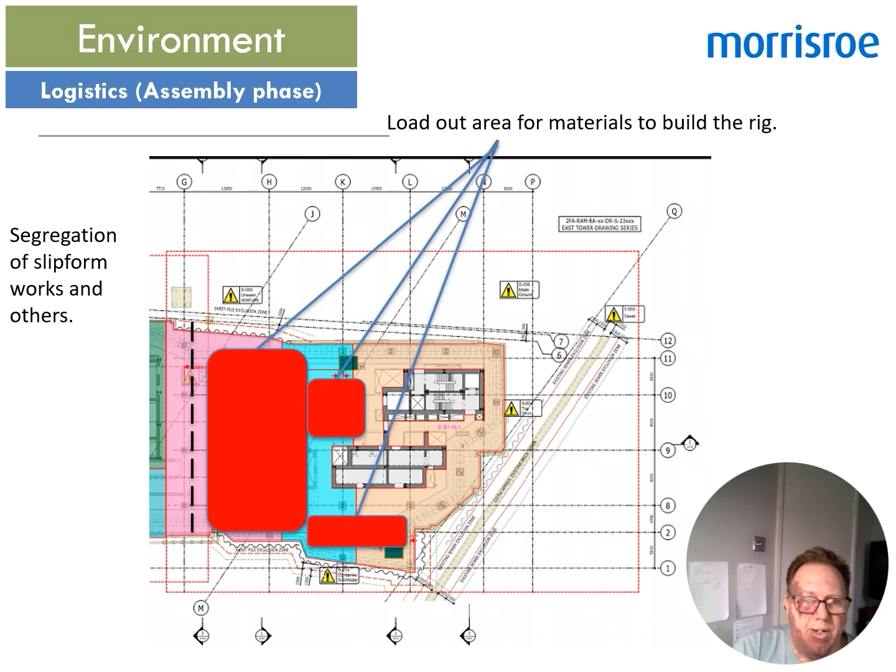We engaged quite early with our preferred hoist contractors, and the locations of hoists were very difficult to be placed. They could only be on the ground floor, and we were kicking off on the B1 slab, so they were delayed for the install, but also positioning of it so that not too much of the steel erection, which started very early on this project, would be interfered with.

So a lot of work was done with the principal contractor establishing where these positions would be and the connections to walls, etc., because this slipform had quite a few walls that fell away, cells that fell away, walls that had large openings in them. So we were very limited in how you could do it.

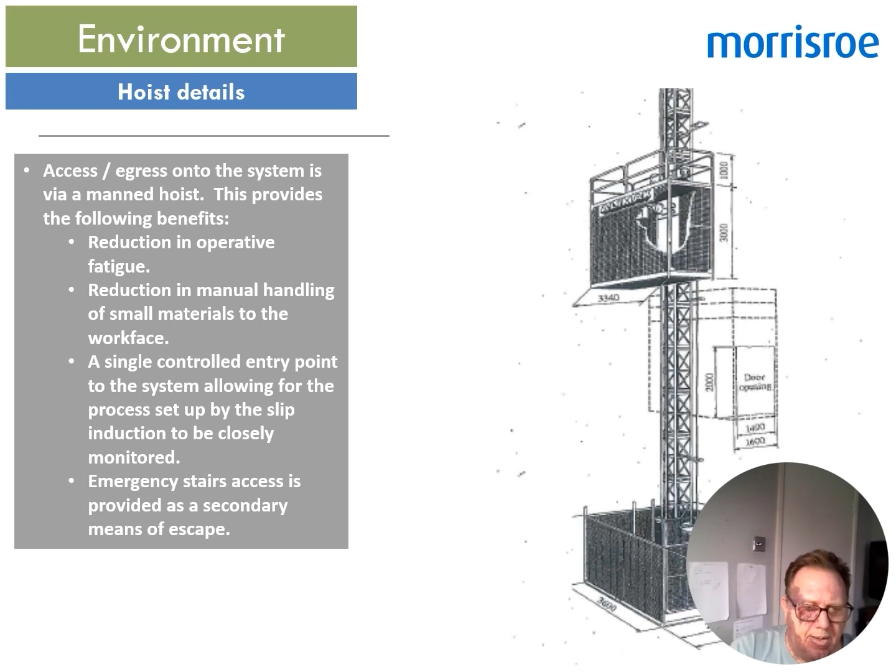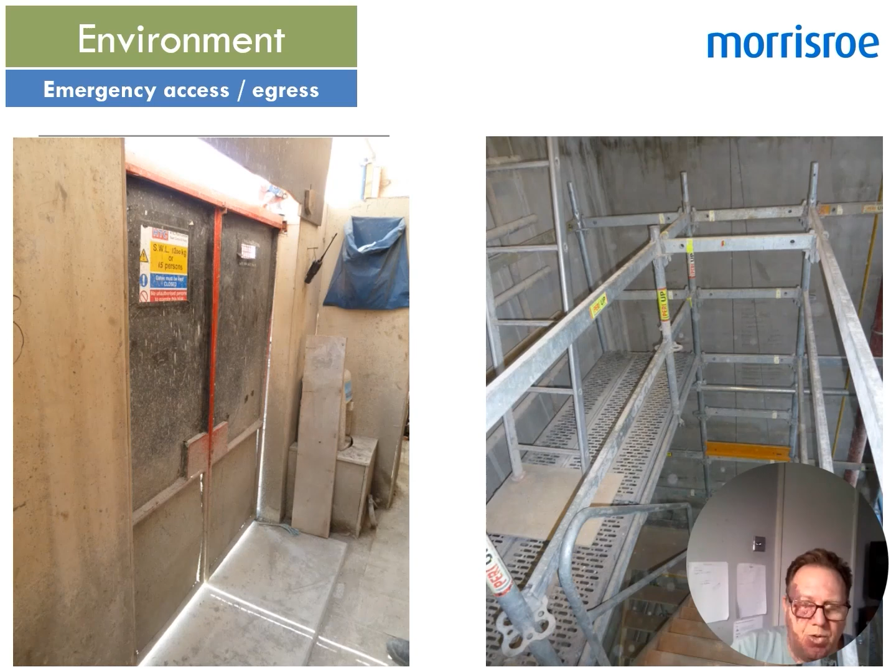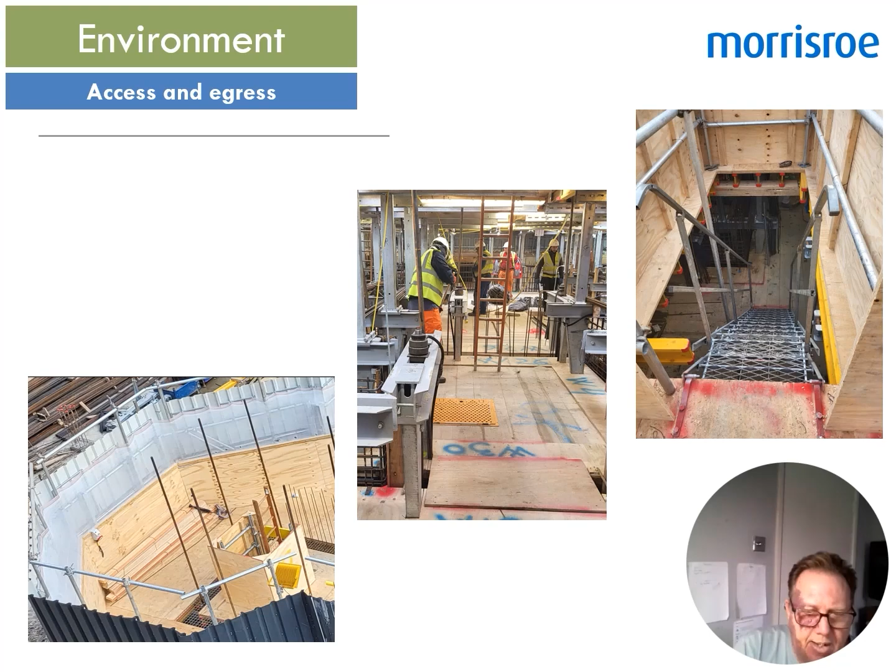We had to review machinery and equipment to be used on the rig, the hydraulic systems, with quite a lot to be done as far as the hydraulics carrying the crane. Pipeline locations are very important in case you have any blockages. We had to make sure the locations were in line with the staircases.

We also reviewed abrasive wheels. Obviously it's a fire risk, and what sort of plant we should use, and we've managed to go away from abrasive wheels and use a guillotine cutting system for anything that's required up there.

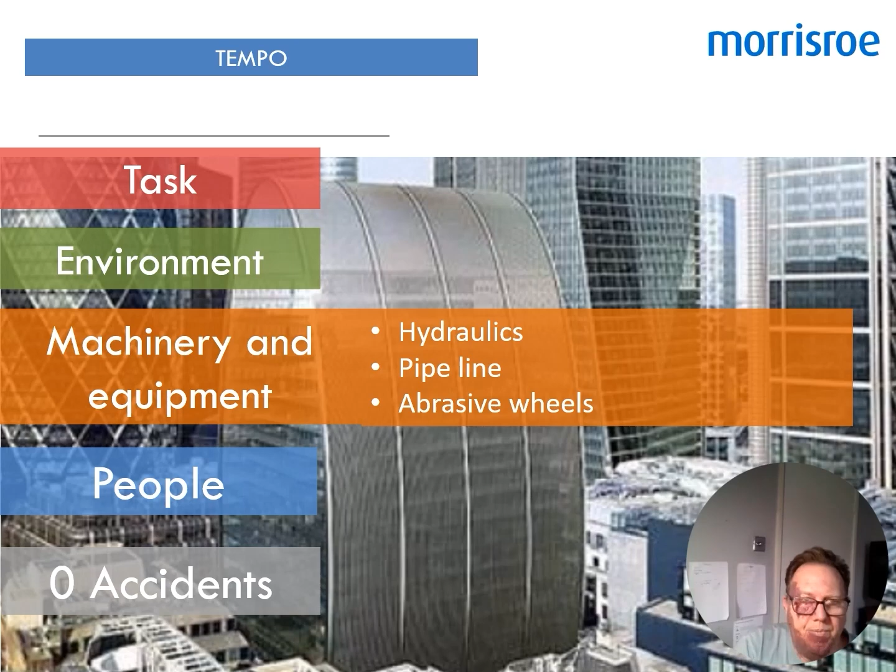The slipform system which we used on this project requires the walings to be welded, so we had to have a proper structural welder on site to mitigate for the risks, eye damage, burns, fire, electrocution, and make sure that our method statements cater for these things, and that the right qualified people are going to be doing the works.

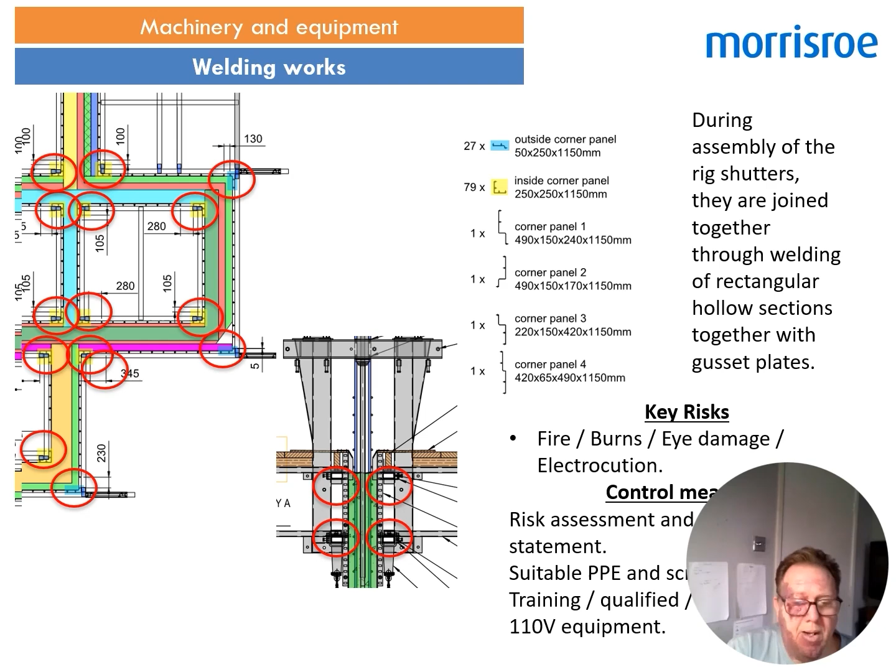We had to review the risks regarding the jacking systems, the hydraulics. Obviously hydraulic oil can cause skin damage, pipe failure. It has a fail-to-safety system should the actual jacking system fail, so it can't actually have a catastrophic failure. A lot of the parts are fed internally within the system, which is much better than overhanging on the top of the working deck. So a lot of the risks are actually mitigated through that as well.

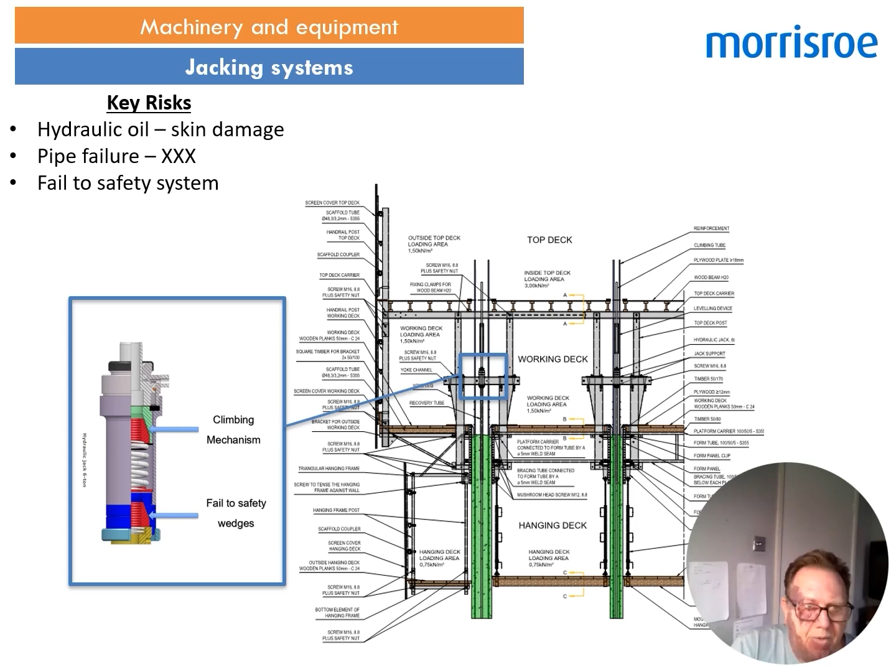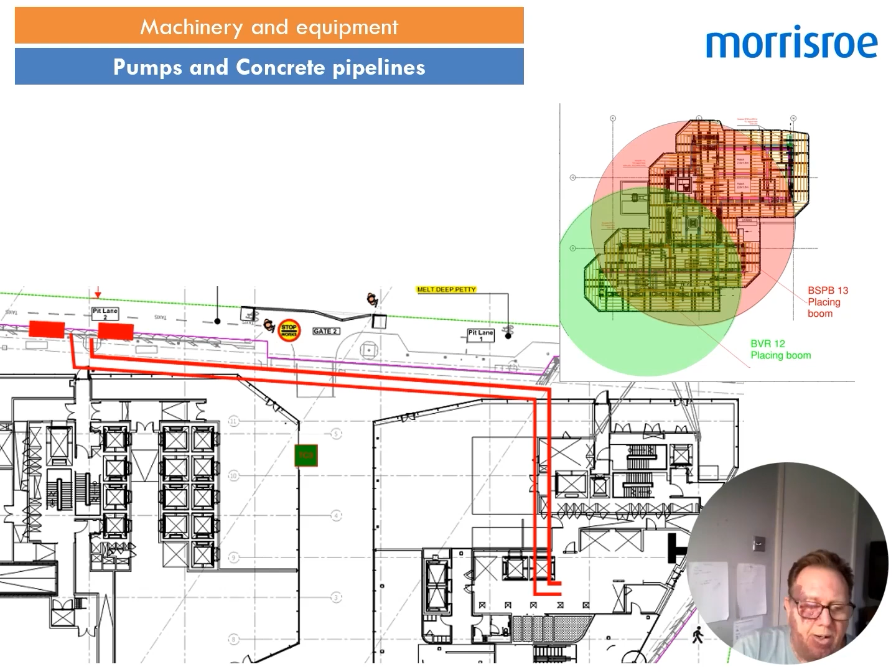With having 2 placing booms on the rig, obviously we've got 2 pipelines coming up. We had to make sure that the PERI UP staircase was adjacent to them. Should there be any problems with pipe blockages, etc., we can actually get to the pipes and not lose a whole pipeline, which would probably lose about 5 days on the project, having to take them down, replace, not to mention the cost.

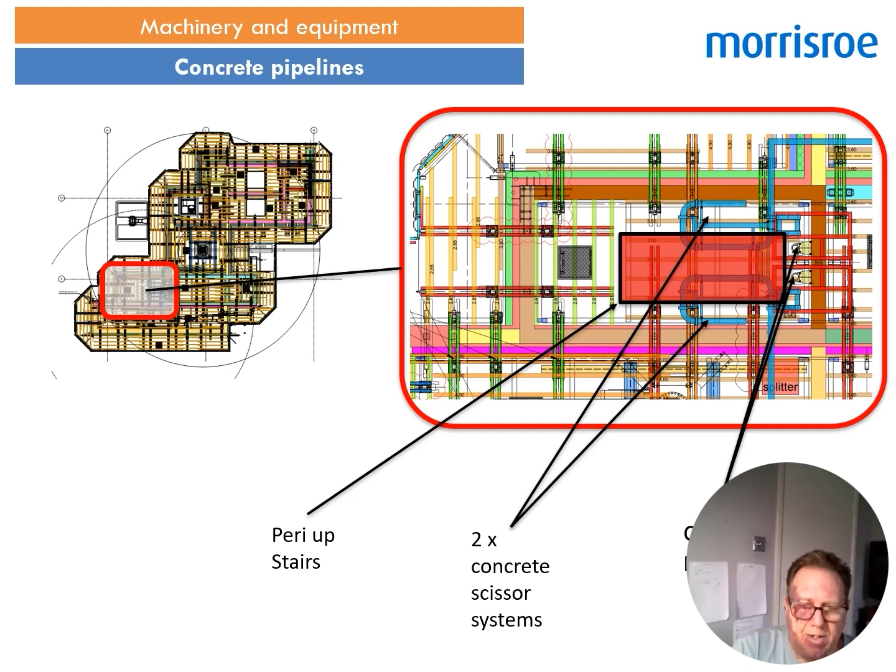This is a typical placing boom arrangement with a scissor system to allow the pipes to be continuously pumping while the rig moves. So this scissor system would close up, allowing the rig to move, and the vertical pipes will be replaced as and when required once the scissor has closed up.

So a review had to be taken of the locations, also when to go from low pressure to high pressure, as the west goes up to 109 meters and the east goes up to 167 meters. So we had to keep a close eye on when we had to make sure that systems were put into place, as well as we had to get 2 new pumps, which are electric. So making sure power to those was sufficient and put into the right places for the operations.

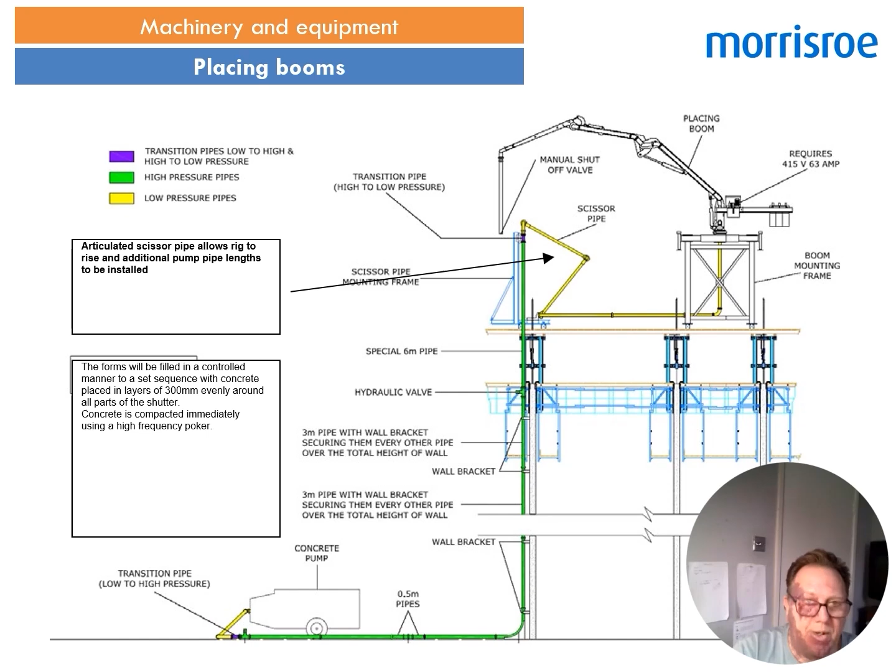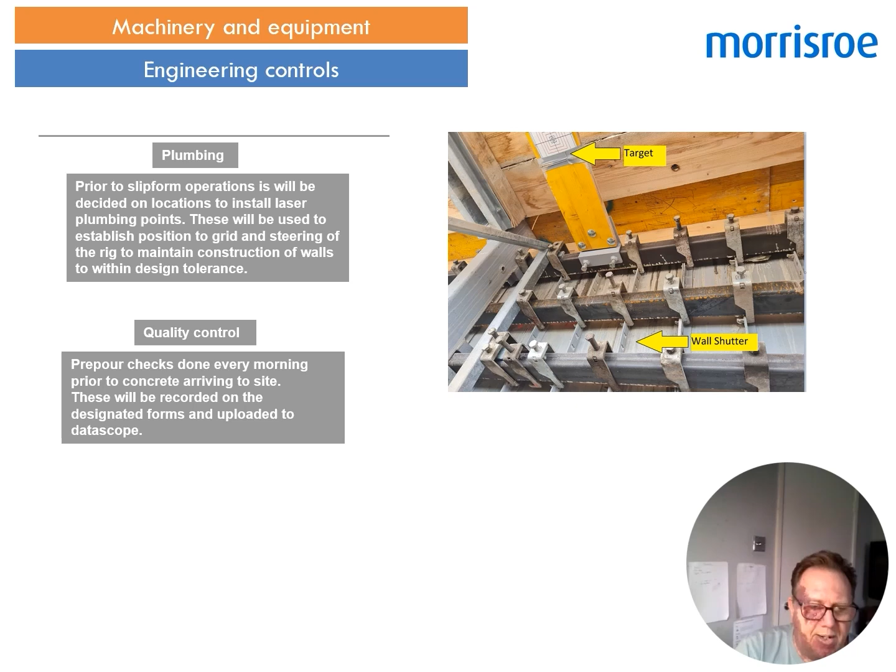With regards to the engineering controls, the core lateral setting out and actually keeping it plumb, there were targets set up. We had very good lasers put in place. The lasers have got a very good tolerance for these tall structures. There were also quality control checks done separately by an internal engineering team, and pre-pour checks done every morning and throughout the day, together with the SRM engineers.

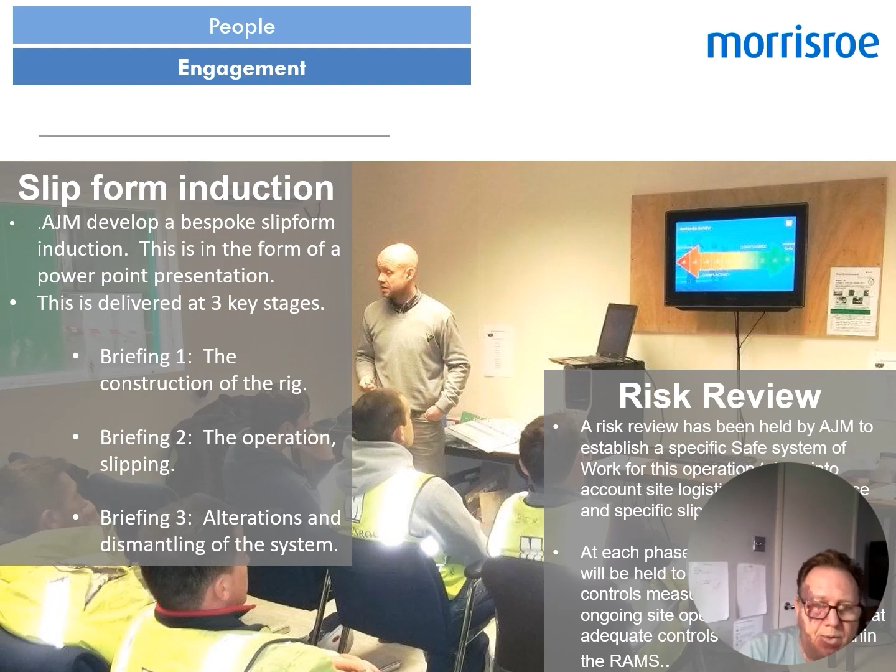In order to have no accidents, we had to get the risk profiles and make sure that control measures were suitable for each of the risks, that they were well looked into and that they were mitigated down to an acceptable level. Slip forms are quite noisy places, mainly due to the high frequency pokers required for the compaction of the concrete. So hearing protection is available at the very bottom before you get to the slip, as well as in different places around the slip form. So it's really important that people adhere to this and protect their hearing, and that it's mandated by the supervision.

Embedment plates are pretty heavy items normally. On this project, considerably heavier than normal. We did an exercise checking all the weights of them, and some of them were up to 245 kilos to be cast into the wall, and then some of the crane connections to the external were up to 750 kilograms. So a lot of work was done, early engagement with McAlpines, making sure there were holes in the plates.

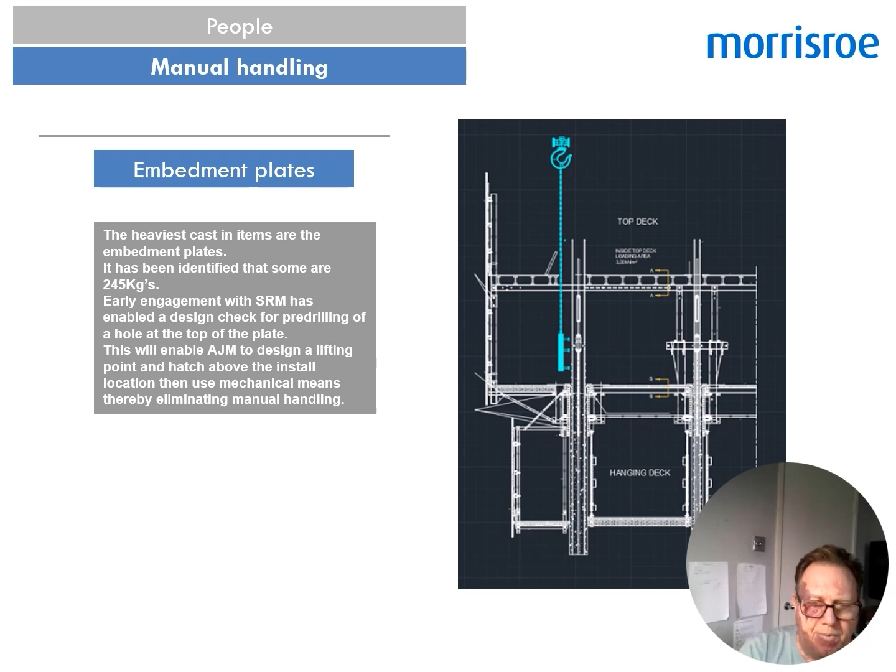We were able to lift them. The top deck had sufficient places that we could drop these really heavy plates through. So manual handling had to be kept to a minimum, and only the very small plates were man-handled. Everything else was either by crane or block and tackle. This is an example of risks that were looked at and noted, and what control measures we thought might be the correct ones to add into the risk assessments.